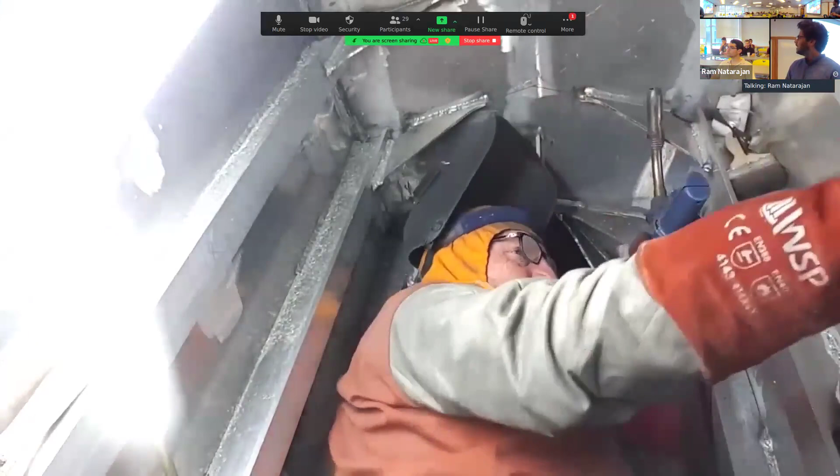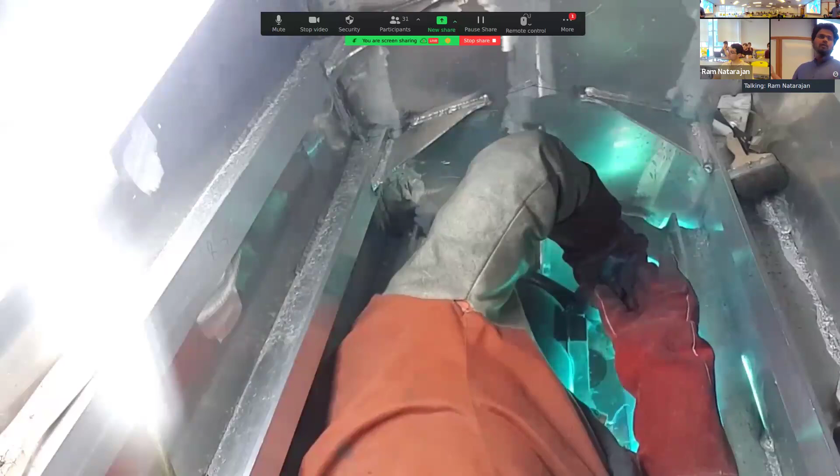So with that motivation, if you switch to something that is not in the air, like something in an extremely confined space like this, where this person is trying to do some welding, you can once again see that if you were to send a robot inside the space to help him, you cannot have a robot that is extremely powerful, because it's going to be right next to a human and it has to be safety certified. With that, these robots have to interact with the environment to do the heavy task, because they cannot lift a heavy object by themselves. They have to get those forces from the environment and make contact with the environment.

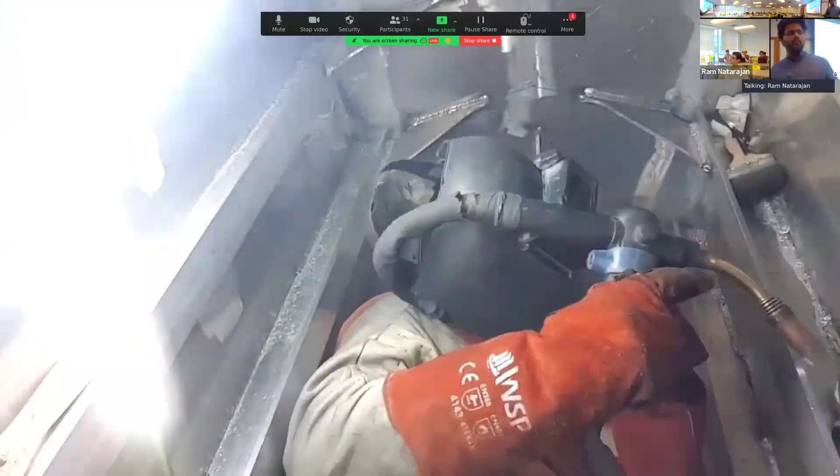So once again, we have a discrete set of variables, which is where to make contact and how to make contact, and the continuous set of variables, which is optimizing, generating and moving through these contact locations. So what I'm trying to get at is we need to think of these two: high-level discrete decisions and low-level continuous decisions. This is the planning problem, and we have tools from motion planning which can do these two things independently really well.

So we have discrete or sampling-based planners that are very simple to use. They can easily be set up. Many of these discrete planners make very few assumptions. They can systematically explore the space and give global guarantees. But mostly they're suitable for low-dimensional planning.

Whereas you have continuous optimization or trajectory methods, which can be fast even in higher dimensional space, and they can incorporate differential constraints. They might be hard to set up, but when you set them up correctly, they come up with these incredible, beautiful trajectories that you're seeing. But people have tried to put these two things together. There are a number of works that try to combine these discrete methods and continuous optimization methods.

But then I think what it boils down to is how they are trying to combine them, right? So most of them take this hierarchical approach of doing these two things in sequence. They first find a set of discrete actions to do, and then through those discrete actions, they find the continuous solution. But that's a very myopic approach in the sense that there is no way for you to backtrack, or these two methods are not talking to each other. There is only one directional communication, and there is no way for you to change the discrete decisions if your continuous exploration is not going correctly, right?

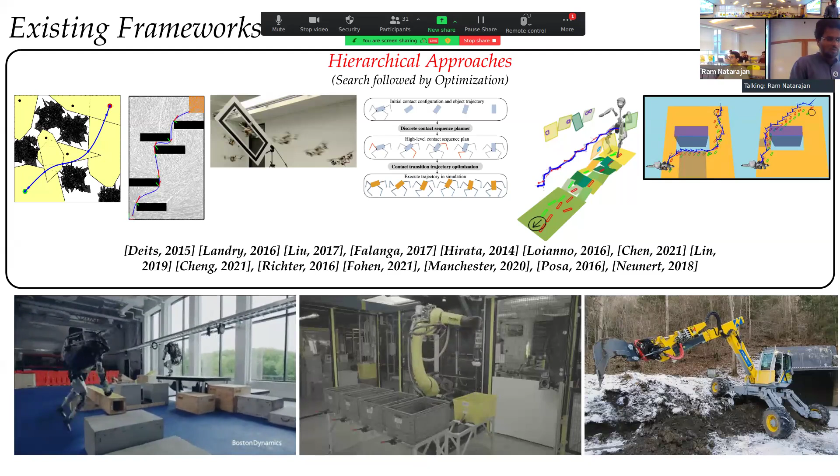But it turns out that these methods actually work really well in practice. Even if you're doing this hierarchical stuff, a lot of things that Boston Dynamics shows in their videos are a pre-computed offline library of motions. And then at runtime, they have a finite state machine or some kind of executive module that is trying to make these discrete decisions. And you have this library of motions following those discrete constraints. Many times these constraints are hand-coded by humans. And the same thing applies to the excavator that you're seeing or the Amazon robots that you see for doing the sorting task.

But if you don't have that human expertise, or if you don't have the bidirectional communication, then things can get tricky very fast. This is a very simple contrived example. Here you have this underwater snake in simulation trying to go deep into that confined space. What is happening here is that you have this discrete path of the head pose that is pre-computed, and then you're trying to find a trajectory. So we are trying these different seed paths here, but it turns out that none of them succeeds when you're doing this sequential operation. So these things suggest that there should be a more unified framework that shares information between these two modules, and that's basically the theme of this work.

So I think the fundamental motivation here is that we wanted to combine the benefits of these discrete search and continuous optimization methods. And the central contribution of this work is this framework called INSAT, which stands for Interleaved Search and Trajectory Optimization. And I'll be talking in much detail about this framework. So the research goal here is to enable this automatic discovery of these complex, global, long horizon and dynamically rich capabilities of these robots by seamlessly blending these discrete and continuous decisions into a single framework.

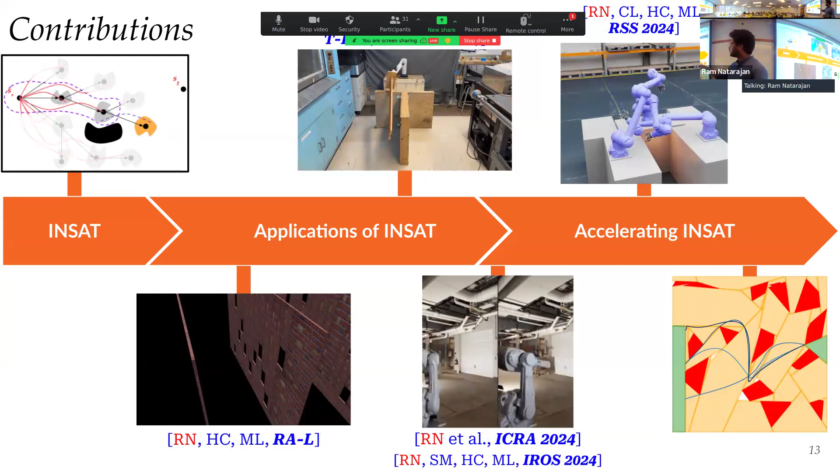Okay, so that brings me to my agenda. First, I will dive deep into this framework called INSAT, and then we will see some interesting applications of INSAT, which are pretty diverse, in my opinion. We are going to see how we can apply it for quadrotor flight, and then also how to use it for planning with contact. Then we'll go into the last part of the talk, where you will see that INSAT starts to have trouble with its running efficiency. So we will focus on how to accelerate INSAT. And in that, I will be focusing on 3 different ways of accelerating. One is CPU parallelization. The other is using rich planning representations to improve it. And the last one is how we can use some pre-processing so that at runtime you can make the most out of it. So this forms the contributions of the thesis. These works are all published in different venues that you see on this slide.

Right. So first I'll go into INSAT. At a very basic level, INSAT.

Is there a hide? Hide video panel right there. Yeah, I made it worse.

Okay, yeah. So I was saying that at a very high level, there is this graph search that is running and going to explore your lower dimensional abstraction of your whole planning space. Then we have the trajectory optimization that is running in your full dimensional planning space, right? So the key idea here is that we are going to use the search to call the shots and make decisions on what optimizations to run and with what initial guesses and seeds. And the optimization is in turn going to drive the search in the correct direction. So it is important that I emphasize that these 2 methods are being alternated and they're not running in sequence. And that's where the information flow is happening in both the directions, right?

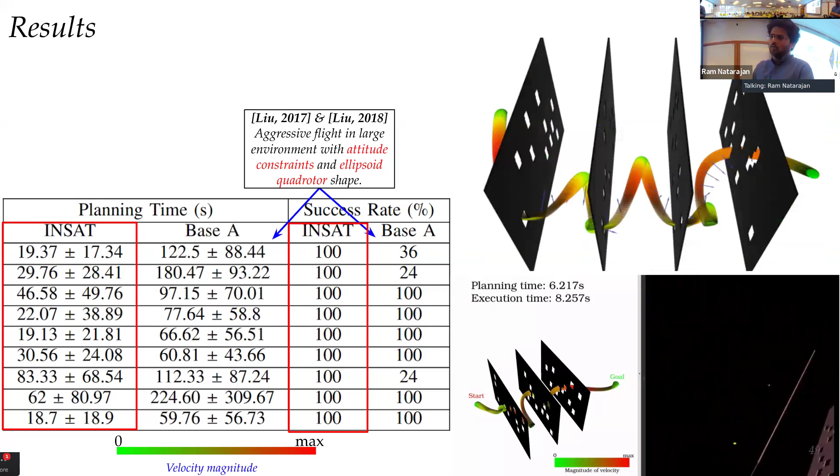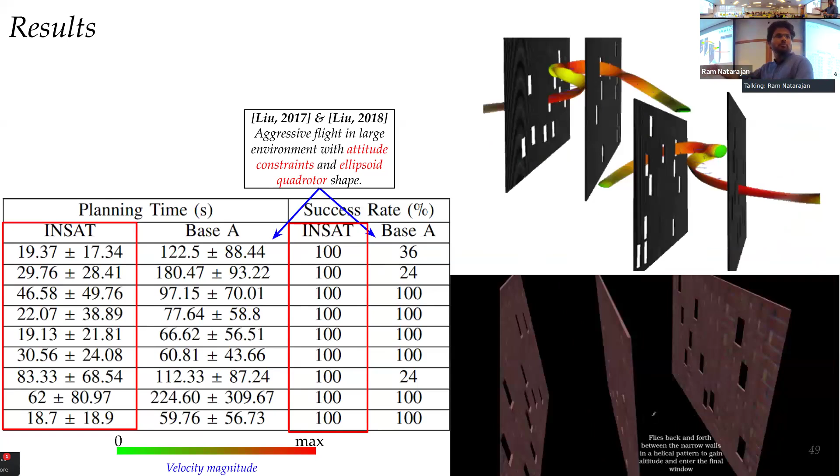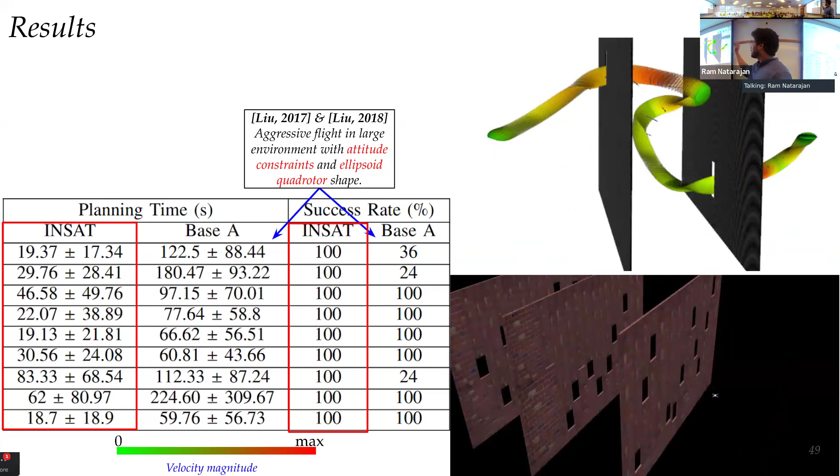So with this, it's a very simple application. We were able to generate these really cool trajectories, in my opinion. The task here is for the drone to fly from one side of the wall all the way to the other extreme, and you have a set of parallel walls with narrow windows that are smaller than the size of the quadrotor, and the gap between these walls is also small. As the search goes close to the window to go through that gap, it might find that it does not have enough acceleration to generate that orientation. So the algorithm is going to backtrack and explore the space such that it can generate these helical paths between these walls to pump energy into the system and come up with that orientation to enter the subsequent window.

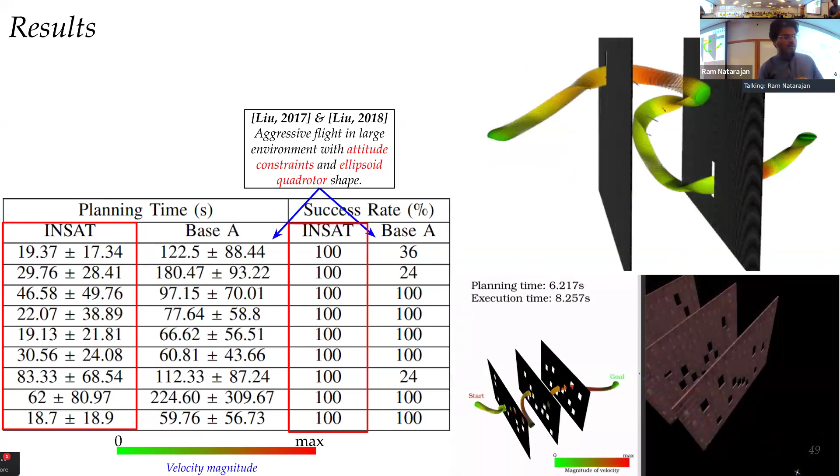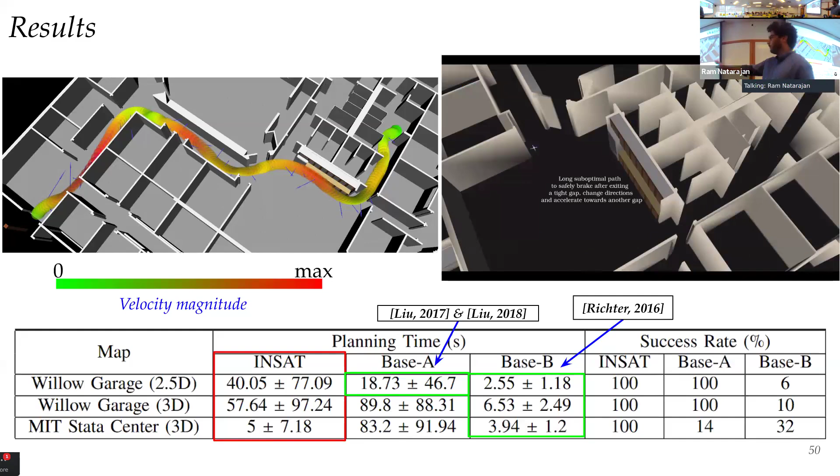We compared it with a baseline that was state of the art at the time, and we see that we are able to plan faster with higher success rate. And you get these global motions. We also tried it on some other environments. This is a garage environment. You can see that there are parts of the trajectory which look clearly suboptimal, but that is because in order to enter the gap that is coming later in time, it needs to take the suboptimal path to once again pump energy into the system and then enter that narrow passage. We have competitive times here, but in the cases where the time is higher, we have a higher success rate compared to the baseline.

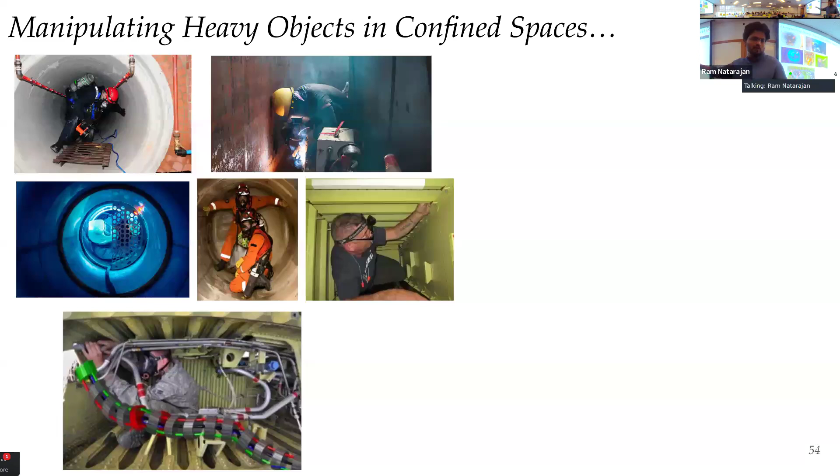Then I'll talk about another application, which is planning with contact. Before I go into that, I just wanted to give a very quick motivation. Manipulating heavy objects in confined spaces is a challenging task, right? You have people trying to do so many things in confined spaces, like welding, like I showed before, or other tasks. And they go through a lot of physiological burden when they're manipulating heavy objects. That was the motivation, and we have two different environments where we deployed our planner. Here, the robot is trying to manipulate an object that is heavier than its payload limit.

So the low-dimensional space is going to explore the quasi-statically feasible configurations of the arm. And then the full-dimensional space is where you're trying to reason about the joint velocity or the contact model parameters, which I'll get into in a minute. And this is going to keep alternating between the two to find the trajectories that I showed. So first I'll talk about the graph search setup.

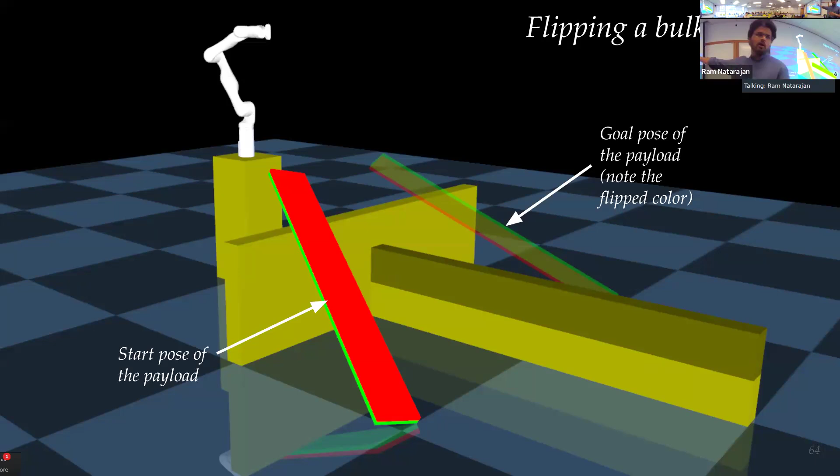So for the simulation, we wanted this robot to transport this payload, and we wanted to also flip the object. So this is a heavy object. We'll be evaluating it for different masses of the object, and the robot by itself cannot lift the object at any configuration. So it has to entirely rely on contacts to generate these motions, right?

So first, I'll just show you how the planner adapts and behaves for different payload masses. Here you're seeing from 1 kilogram to 4 kilogram, and from the behavior you can tell that it struggles more as you go towards 4 kilogram. But the most interesting thing for me is when we push the limits all the way to the 6 kilogram payload, the robot itself has a proximal limit of 4 kilogram and distal of 2 kilogram. So it's able to still move this object by entirely searching and exploring that very constrained manifold in your configuration space. And the cylinders that you see here are the contact locations, and it's able to successfully move the object to the other side.

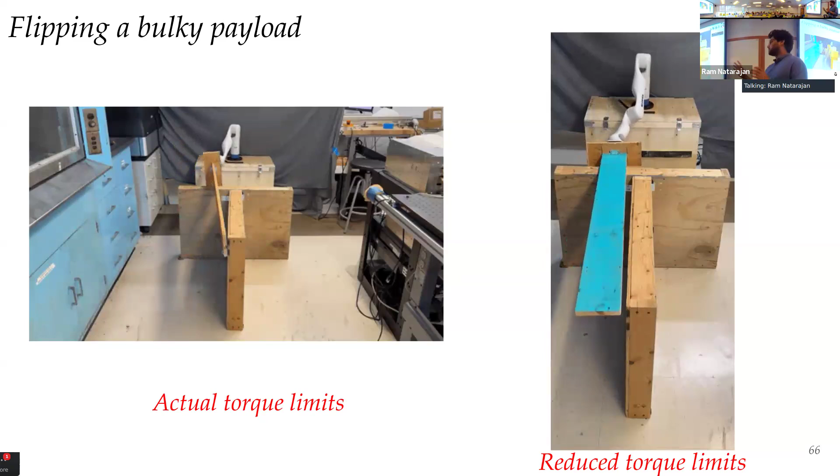So we also deployed this on the real system, and here you can see that we tested it for 2 different setups where you have the actual torque limits and the reduced torque limits. The reduced torque limit is set in the software. And once again, you see a difference in the behavior, that it takes more time and still ends up finding a solution even with reduced torque limits.

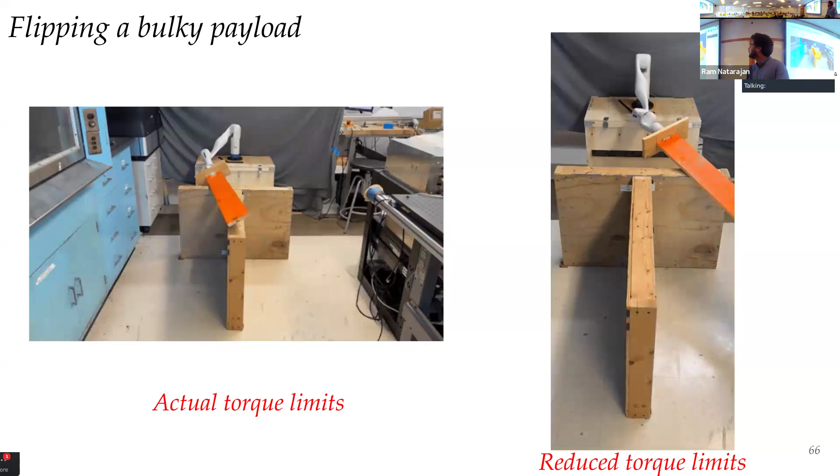So there's one more task that I wanted to show here. This is once again a payload transportation task. You are transporting this 2.5 kilogram payload. But there is a slightly different constraint here because of the shelf wall that is behind the robot. You cannot go past a distance, and the robot is unable to lift the object in its initial configuration.

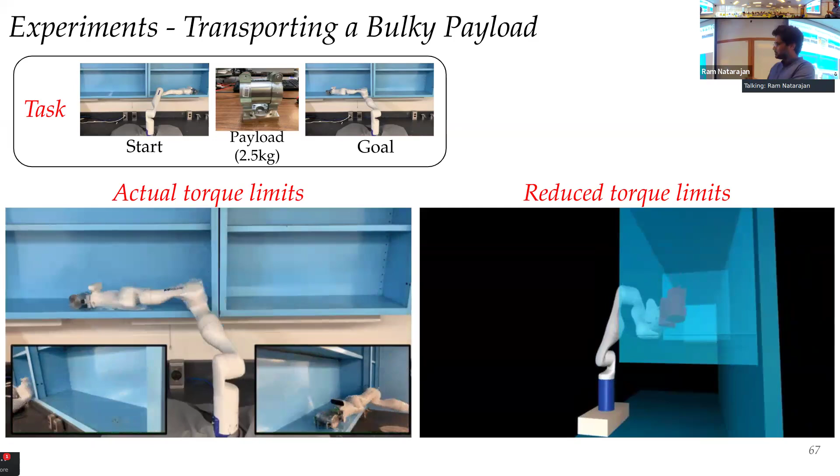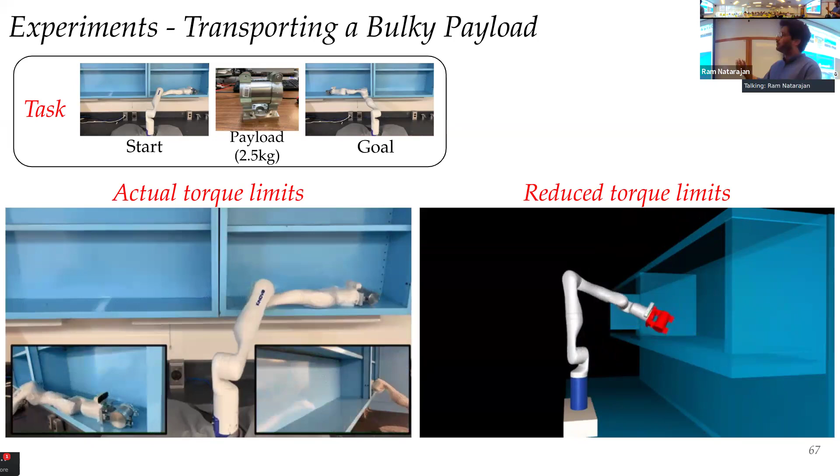So what it ends up doing is it uses its wrist entirely to nudge and find those initial configurations to get out of the confined space. And then once it comes to the center part of the shelf, it's in the distal configurations and it's able to lift the object, turns around, places it on the other side and slides it in.

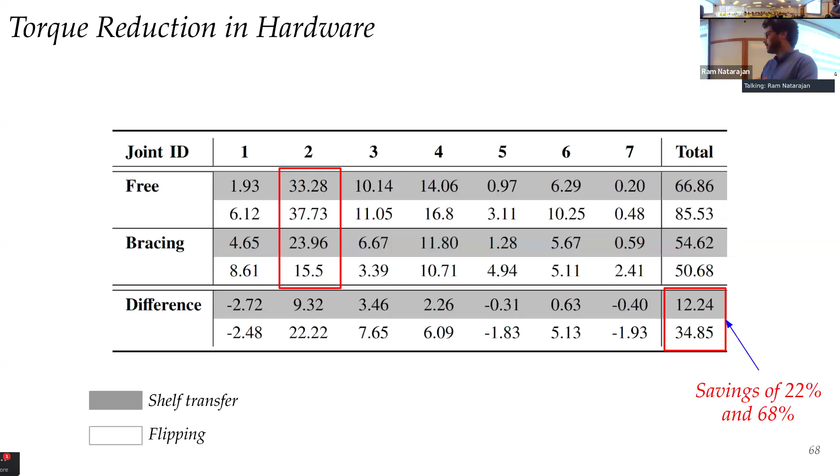So in terms of the torque reduction in hardware, you see that for the shelf transfer task, you see a saving of around 22%, and for the flipping task, you see around 68% reduction in torque. So we also tested it for different heights of the partition, and we see that it's only our method that is able to complete the task without ever exceeding the torque limit in any of the joints.

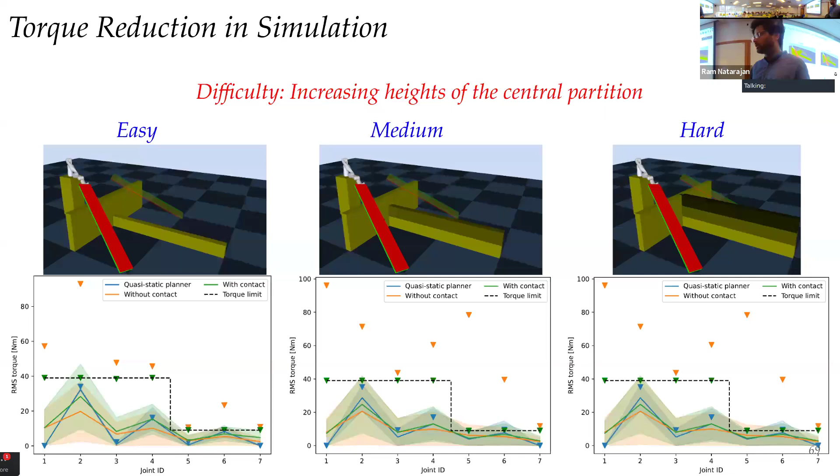So there are some methods that produce lower average torque, but then they end up consuming more torque. They have higher maximum torque, which means it's infeasible. So there is one more thing that I wanted to quickly show.

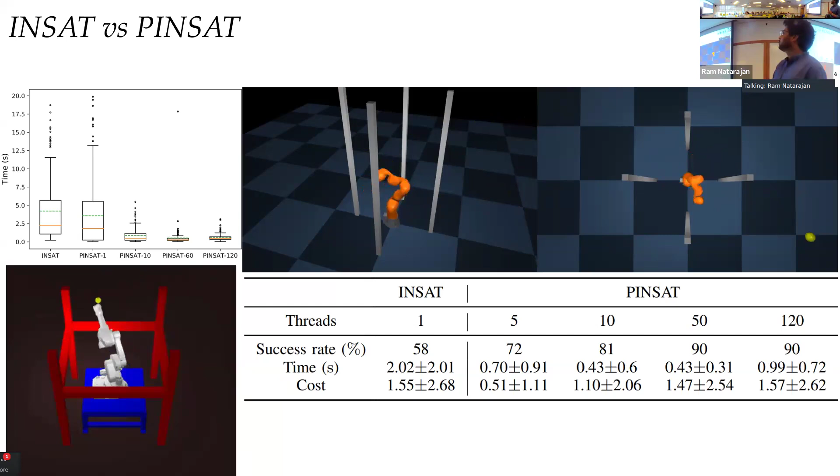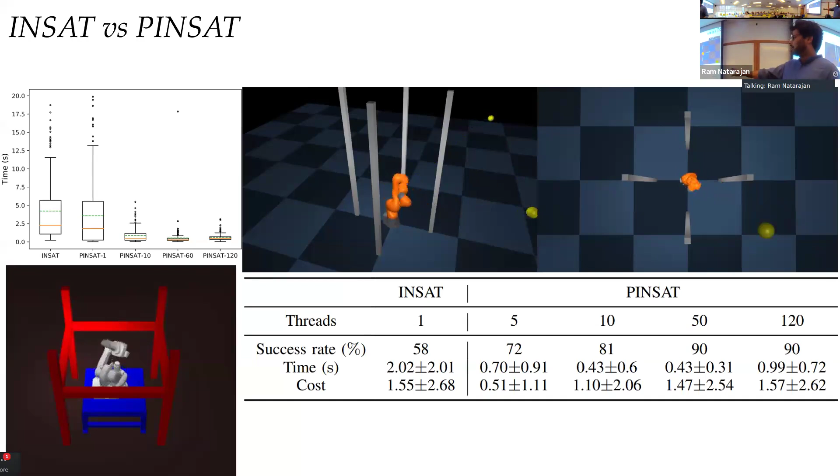In the top video, you have multiple balls being thrown at the robot, and so the robot has to exactly intercept all these objects in time, and at the same time position itself in such a way that it can reach the subsequent ball more efficiently, right? It has to orient itself in that way. In terms of the results, we see that by using around 50 threads, you get a 2 times increase in success rate and a 4 times reduction in planning time.

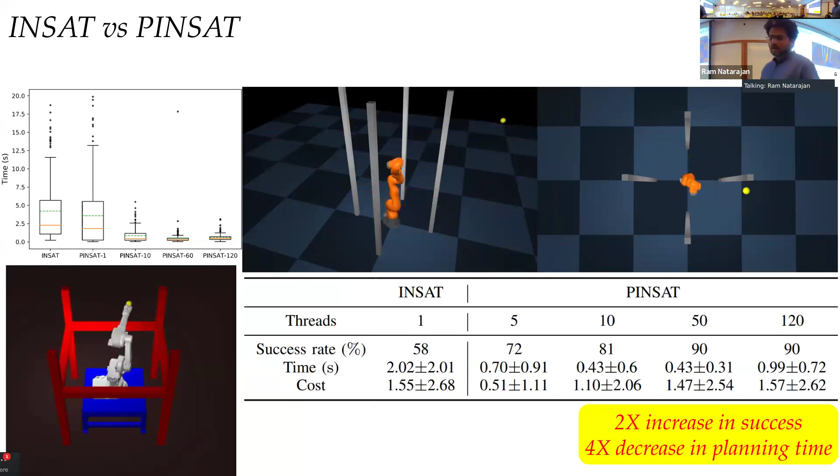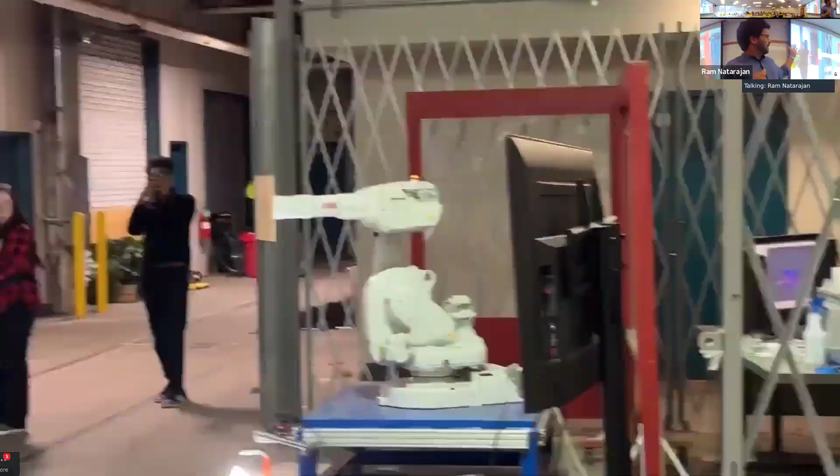And we were also able to run this on the real system. This is a demo that we had at the National Robotics Week. Here, I'll first explain the system, and then maybe I'll go into how PINSAT is used. The system is that there is a person throwing a ball at the robot, and you have live perception looking to detect these balls.

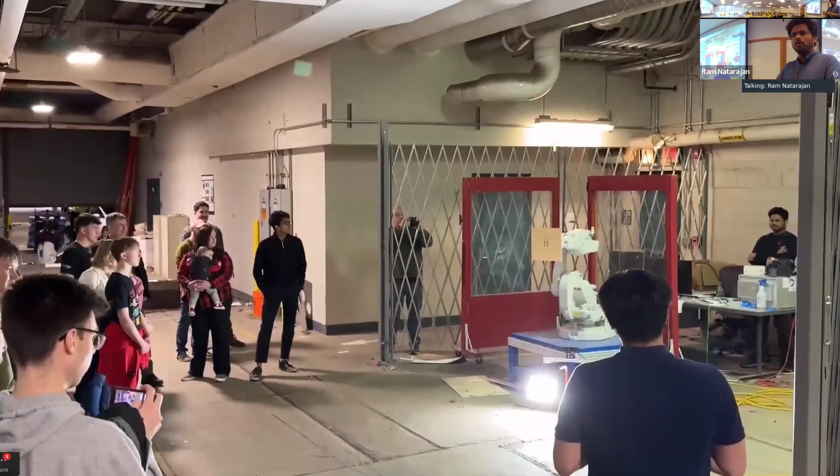But the challenge here is that, in this system at least, between the time the robot sees the ball and the time the robot intercepts it, we only have 350 milliseconds. And in that 350 milliseconds, you need to perceive the ball, predict its future motion, plan what has to be done, and then execute the plan, like moving from point A to point B on the robot. So this is a very challenging task in terms of the time it has, right? So we used PINSAT to pre-process a motion library to generate these motions, and that's what is executed on the robot.

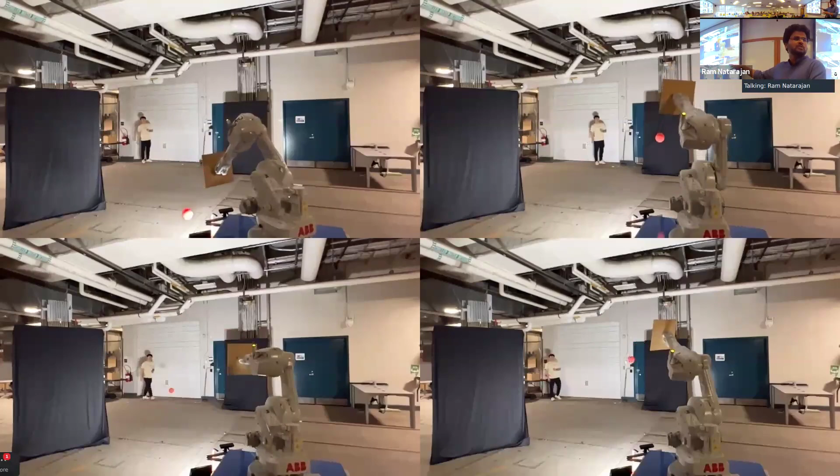In addition, the people who funded our project were also interested in putting the system on a moving platform, which means that they want to reduce the amount of impact that the system creates on this moving platform when it moves. So we also had significant torque reduction in that moving platform. We have some results on that, but by using a kinodynamic planner, we were able to optimize for the reduction of torque in that moving platform.

Cool. So one last time, going back to this example. At this point, I think it should be familiar how INSAT is running. But let's say that this one-to-many mapping, which can be arbitrary, is actually made of convex sets instead. And in addition to these convex sets, if you also have the relationship between the subsequent convex sets as convex constraints or convex cost functions, then you have a setup where, in that ancestral path, assumption 3 holds true, which is basically that you can find a trajectory that is globally optimal within that space, but locally optimal in the overall graph, right? And this is basically the graphs of convex sets representation.

In the next part of my talk, I'm going to explain how the search methodology that INSAT has can help search in this new representation faster, and how INSAT can benefit by using this new representation. So that is the sophisticated planning representation.